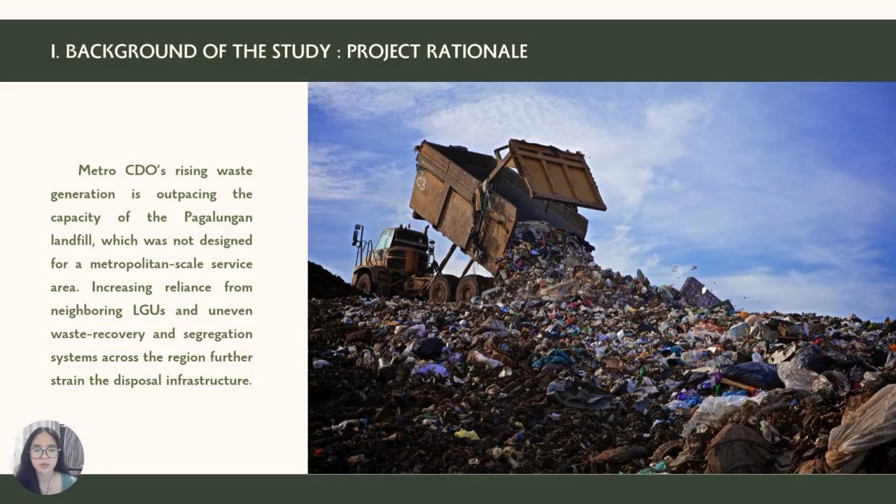This study seeks to rationalize the need for optimizing current landfill operations, improving upstream waste processes, and creating an integrated SWM program that aligns with national mandates such as RA 9003, Sustainable Development Goals, and emerging circular economy frameworks. By establishing this rationale, the study positions itself as a timely and vital initiative that supports both short-term operational improvements and long-term metropolitan resilience. Next is the related studies and literature.

The Pagalungan landfill has been under continuous scrutiny and regulatory oversight by the Environmental Management Bureau of the DENR Region 10 due to persistent concerns over its compliance with the standards and operational requirements set by RA 9003. Multiple inspections, monitoring reports, and issued notices have highlighted lapses in environmental safeguards, infrastructure adequacy, and procedural adherence, prompting ongoing corrective actions and heightened regulatory pressure on the facility's operations.

So, the current issues of environmental compliance are poor waste segregation, recent interventions from the city, leachate management problems, improper landfill expansion and operational violations, and mud-damaged access roads. The major issues in the Barangay Pagalungan SWM management are contractor performance issues, unauthorized dumping and junk shop violations, a non-functional leachate treatment facility, and inadequate access roads.

Next, the citywide SWM systemic issues of Cagayan de Oro City are its low compliance with waste segregation at source, barangay MRF non-compliance, and its lack of alternative disposal technologies.

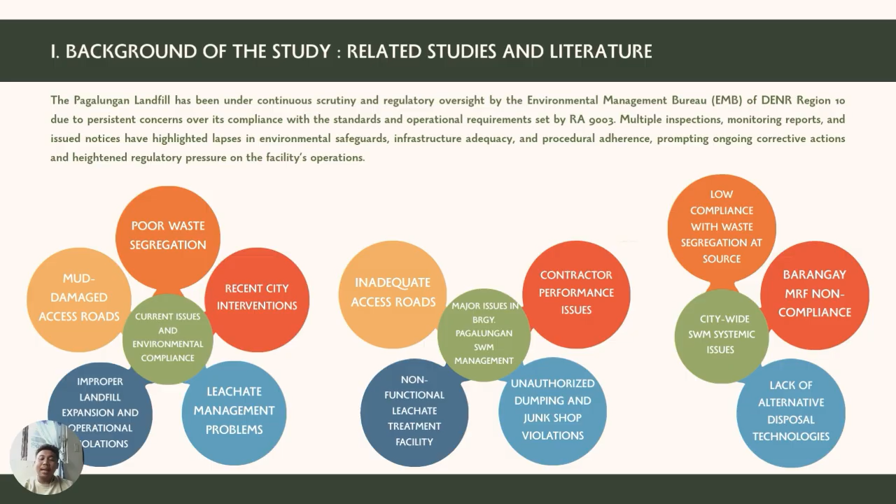For the weaknesses, we acknowledge concerns such as soil erosion, leachate risk, and vegetative loss. These are typical vulnerabilities of landfill sites, and recognizing them early justifies the engineered controls we incorporated, including liners, drainage channels, and reforestation. We also point out community perception and health concerns, which validate the need for transparency, better facility design, and strict environmental safeguards.

Opportunities show the project's potential to go beyond basic disposal. The site can host solar and wind installations, expand recycling and composting, and even adopt waste-to-energy systems. Public-private partnerships and eco-education programs further support long-term sustainability and community engagement.

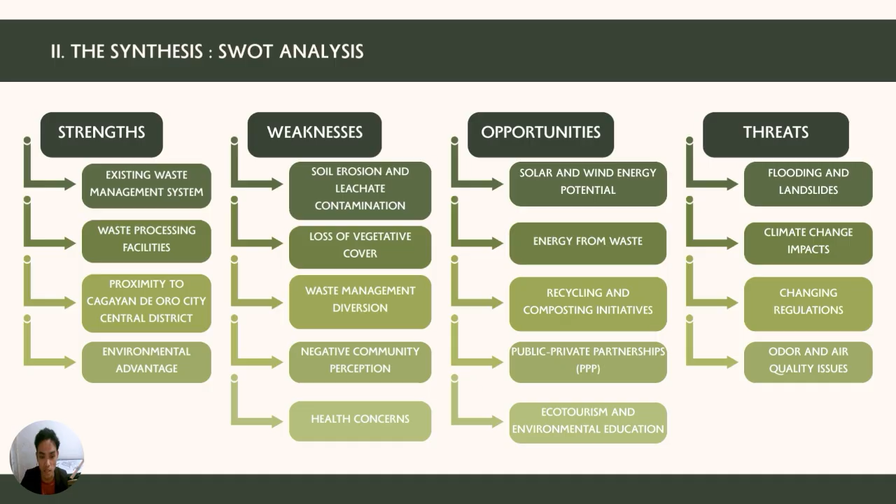Finally, the threats such as flooding, climate impacts, regulatory changes, and air quality issues emphasize why resilience is central to our design. These risks justify our choice of durable materials, proper zoning, and proactive environmental management. Overall, this SWOT analysis does not just list factors but demonstrates why the project strategies are necessary and well grounded. So now let's move on to our problem synthesis.

The proposed Metro Cagayan de Oro Regional Sanitary Landfill Optimization and Integrated Solid Waste Management Program is a comprehensive technical intervention designed to address the operational, environmental, and systemic deficiencies identified in the current landfill facility. The project encompasses the engineering enhancement of existing landfill cells through improved slope stabilization measures, installation of advanced leachate collection and treatment systems, and reinforcement of impermeable liners to minimize subsurface contamination.

It also integrates vegetative rehabilitation and buffer zones, reforestation to mitigate habitat loss and erosion. Operational improvements include the establishment of a material recovery facility, a hazardous waste microtreatment unit, and waste diversion infrastructure to reduce residual waste entering the landfill.

The program further incorporates air quality control measures such as methane capture or flaring systems, odor mitigation technologies, and continuous environmental monitoring. Collectively, these components aim to upgrade the facility into a regionally coordinated landfill system capable of meeting contemporary engineering, environmental, and public health standards.

The selection of this project was guided by a diagnostic evaluation of the landfill's existing conditions, wherein the identified weaknesses demonstrated significant risks to environmental integrity and operational sustainability. Technical assessment revealed that soil erosion along steep fill slopes, inadequate leachate containment, and the absence of engineered diversion pathways could accelerate geomorphological instability and contamination of adjacent water bodies.

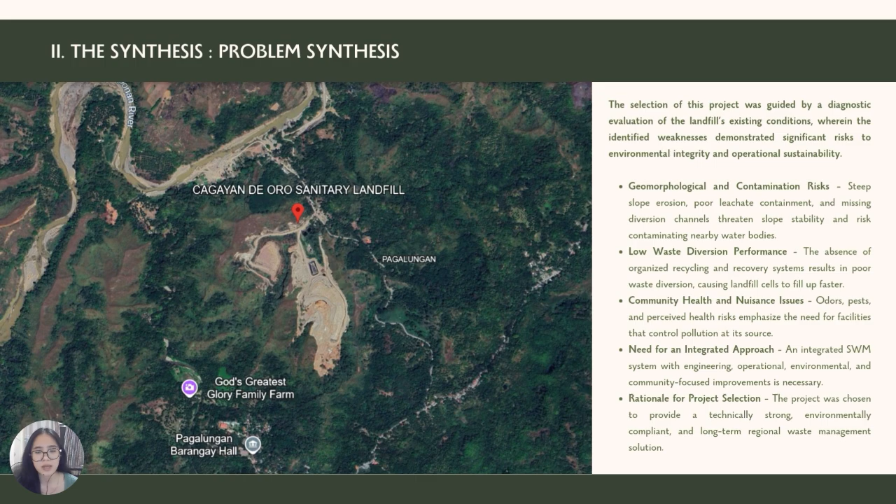Next is the project filtering. We have set up two project filters for the proposed landfill development. The first filter is the strategic fit and regional integration. It ensures that the project supports the spatial and functional structure of Metro-CDO. It prioritizes facilities that serve multiple LGUs such as Cagayan de Oro, El Salvador, and Alubijid, and promotes shared infrastructure efficiency. It reinforces inter-LGU cooperation and reduces duplication of waste facilities.

Next filter is environmental sustainability and resilience. It evaluates compliance with the DENR EMB standards of RA 9003, prioritizes sites with proper liners, leachate treatment, and gas control systems, and promotes waste diversion such as segregation, recycling, and composting to minimize the landfill impact and extend its lifespan.

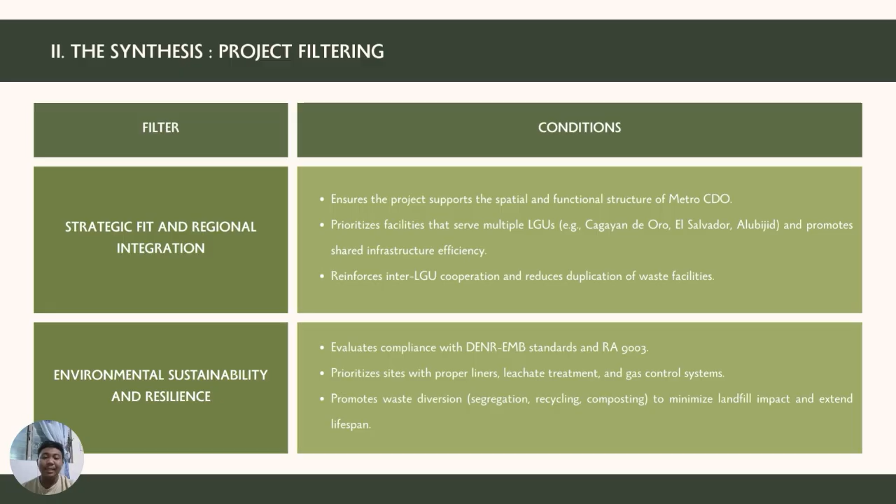Its location in Barangay Pagalungan is highly accessible to CDO and neighboring municipalities, making it a logical regional waste management hub. The site also has a single controlled access road, which is an advantage for monitoring, security, and environmental compliance. The surrounding steep natural terrain acts as a natural buffer, significantly reducing odor, noise, and visibility impacts on the community. Another advantage is that the site is far from dense residential zones, which minimizes social conflict and health risk.

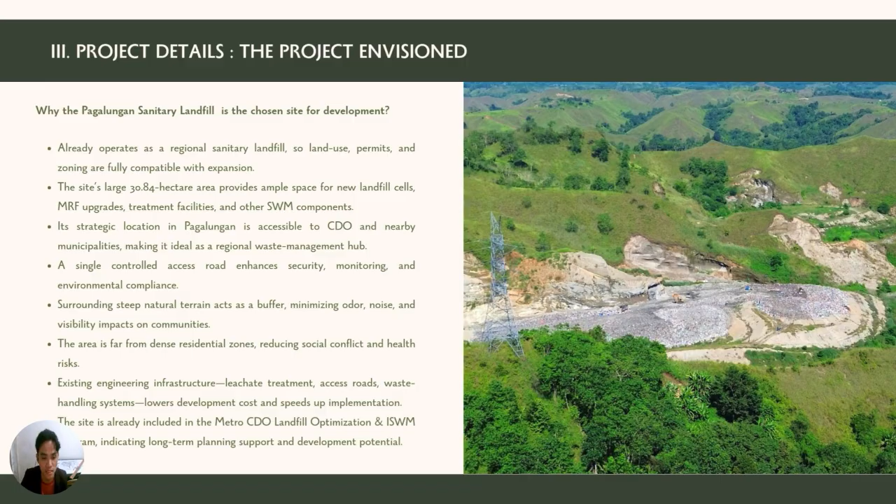The existing engineering infrastructure, such as leachate treatment systems, access road, and waste handling facilities, lowers development costs and accelerates implementation. Finally, Pagalungan is already included in Metro-CDO's long-term landfill optimization and ISWM plan, which means the site has strong institutional support and clear development potential.

So now let's talk about the chosen site. The 308,394 square meters or 30.84 hectares site forms an irregular polygon shaped by its natural topography and engineered landfill components, resulting in a landscape that blends operational zones, buffer areas, and environmental control features.

Access to the property is limited to a single vehicular entry point on the eastern side, which links to the barangay road network serving nearby communities in Barangay Pagalungan and serves as the only route for waste transport trucks, service vehicles, and maintenance personnel entering and exiting the facility. No additional access is available along the northern, western, or southern boundaries due to steep forested slopes, protected terrain, and undeveloped land that inherently restrict movement and preserve natural cover.

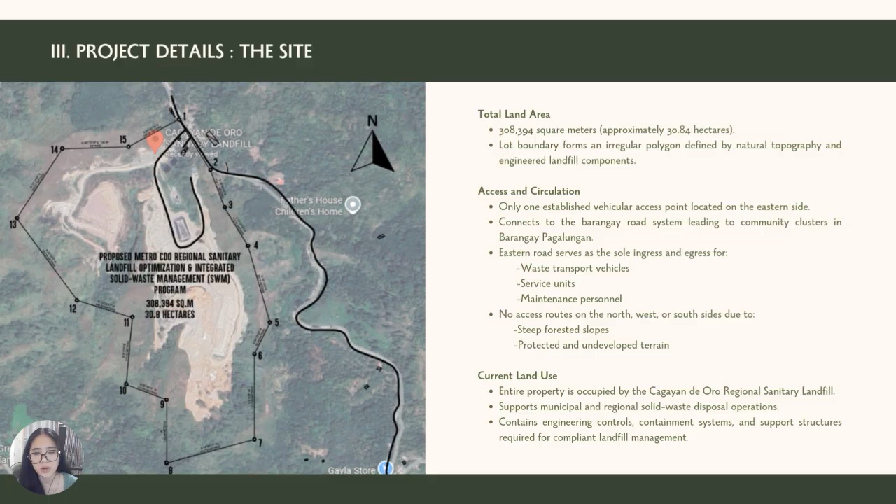The entire area is dedicated to the operations of the Cagayan de Oro Regional Sanitary Landfill, accommodating regional waste disposal activities as well as the engineered containment systems, monitoring infrastructure, and support structures required for compliant landfill management. The site's configuration and limited access underscore the importance of efficient circulation planning and robust environmental safeguards to ensure safe, continuous, and sustainable facility operations.

For the next project detail is the design concept. The site is situated in Sitio Buracan, Barangay Pagalungan, Cagayan de Oro City, approximately 17 kilometers from the city center. The facility has a total land area of about 30.84 hectares. For the daily volume, the city generates an estimated 600 to 700 tons of garbage per day, which is managed by the City Local Environment and Natural Resources Office, or the CLENRO, and its contractors.

The architectural style of the whole facilities inside the landfill development is contemporary industrial architecture, which is defined by large span structures, exposed steel elements, simple geometric forms, and functional layouts that support efficient operations and natural ventilation. Contemporary elements such as patterned facade screens, earth tone finishes, and vertical shading enhance the utilitarian character, creating a cohesive, modern visual identity through clean lines, modular rhythms, and refined detailing.

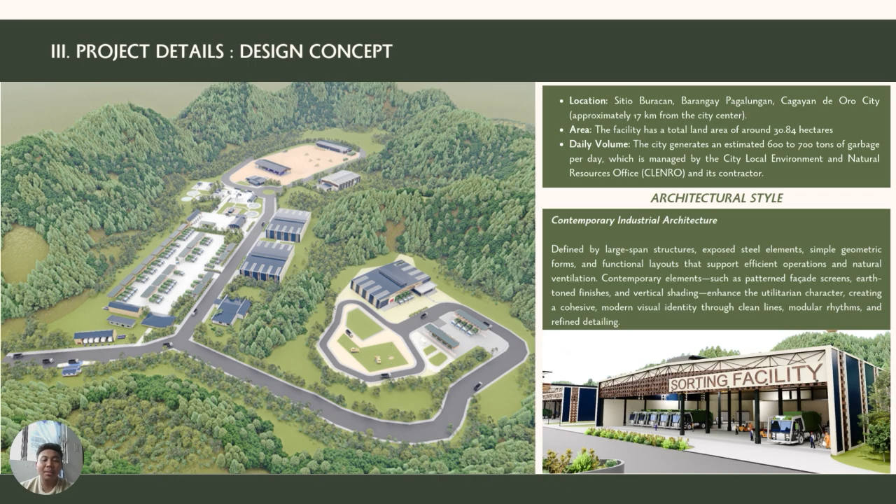The design concept of the proposed Metro-CDO Regional Sanitary Landfill Optimization and Integrated Solid Waste Management Program is anchored on the principles of environmental sustainability, engineering efficiency, and long-term operational viability. Quote: reimagining waste infrastructure through regional synergy and sustainability.

For our philosophy: study nature, love nature, stay close to nature, it will never fail you. This philosophy positions nature as the primary design guide in architecture and a meaningful tool for environmental stewardship. By integrating ecological sensitivity with purposeful built forms, the project becomes resilient, context-driven, and capable of elevating Metro-CDO's waste management identity while upholding the natural systems that sustain the region.

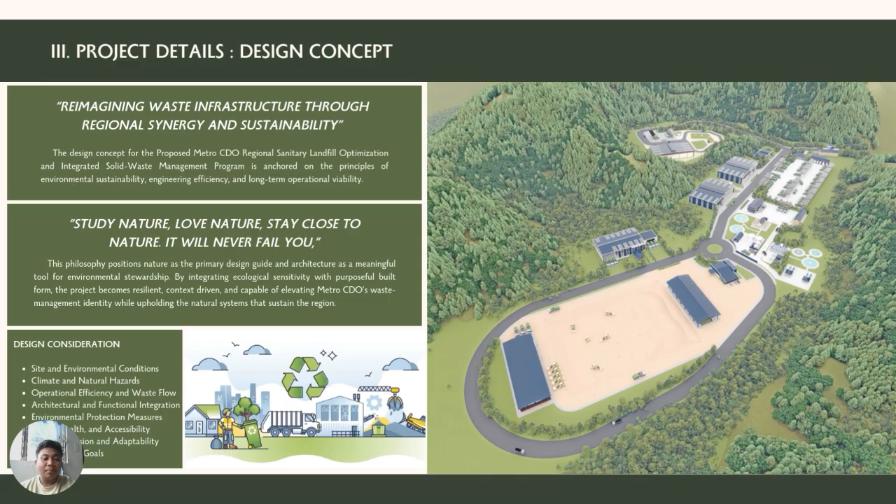For our design considerations, we have the site and environmental conditions, climate and natural hazards, operational efficiency and waste flow, architectural and functional integration, environmental protection measures, safety, health and accessibility, future expansion and adaptability, and sustainable goals.

Next, we have the project phasing. We have 5 phases for our landfill development. The first phase, the site preparation and essential infrastructure, includes land clearing, earthworks, slopes and slope stabilization, perimeter fencing, main access roads, stormwater channels, and drainage control. Phase 2, the core sanitary landfill system, includes the first landfill cell, leachate treatment facility, the weighbridge, disinfection area, and internal service roads around the landfill cells.

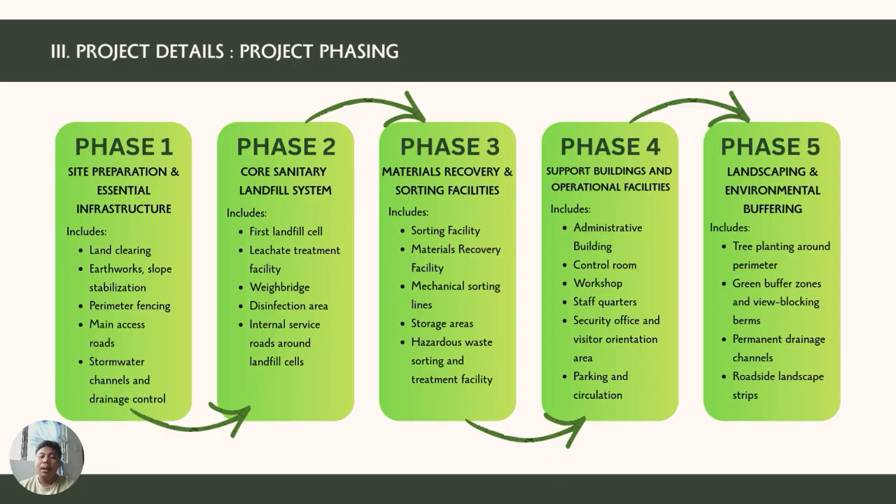Phase 3, the materials recovery and sorting facilities, includes the sorting facility, the materials recovery facility, mechanical sorting lines, storage areas, and hazardous waste treatment facility. Phase 4, the support buildings and operational facilities, includes the administrative building, the control room, the workshop, the staff quarters, the security office and visitor orientation area, and parking and circulation. The last phase, phase 5, is landscaping and environmental buffering, which includes tree planting around the perimeter, green buffer zones and view blocking berms, permanent drainage channels, and roadside landscape strips.

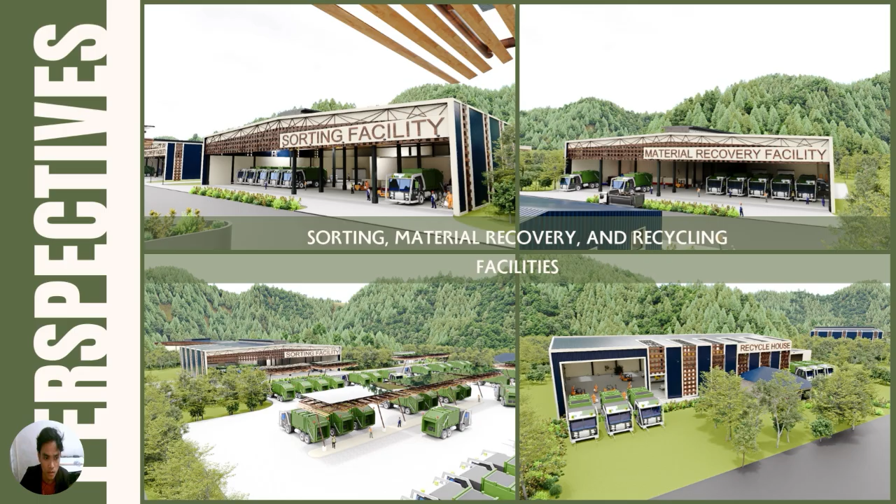This image shows the sorting facility designed for initial waste segregation. The open structure and large span support efficient workflow and safe equipment movement. The second perspective highlights the MRF, or Material Recovery Facility, where recyclables are processed. The layout prioritizes clear workflow and safe circulation for both workers and vehicles. The third one at the bottom shows the recycling house, where recovered materials are refined or prepared for reuse. The design incorporates ventilation and daylight to improve working conditions.

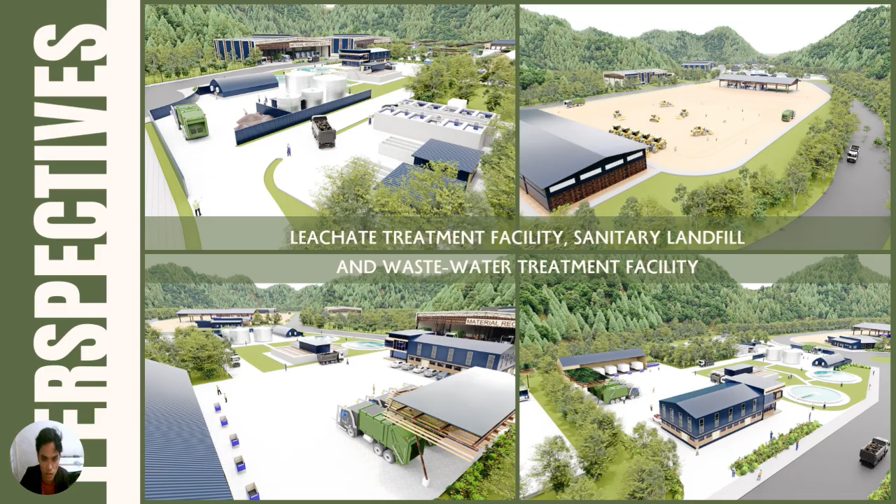Here the first image shows the leachate treatment system, designed to prevent groundwater contamination through a controlled collection and treatment process.

So in the second one, we have our sanitary landfill cells positioned to work with the natural terrain and supported by engineered liners and drainage system. And lastly, we have the wastewater treatment area that handles site-produced liquid waste, ensuring compliance with environmental standards.

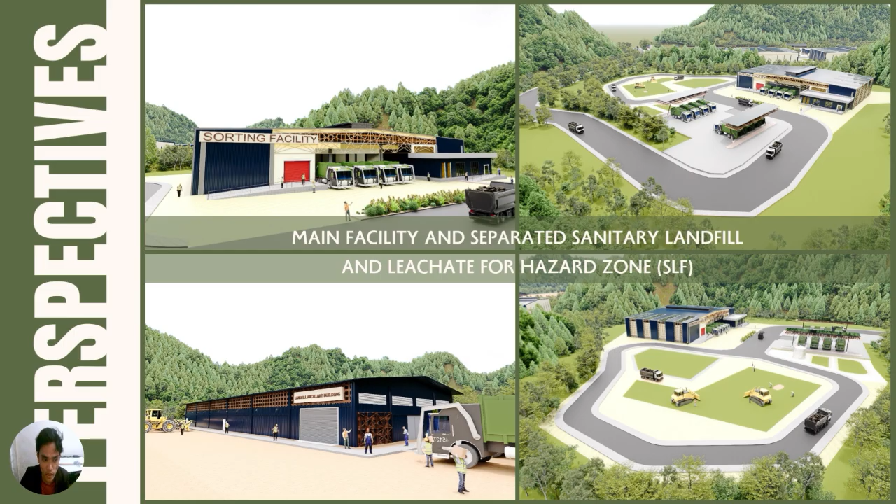In this one, we have the main facility for hazard zone. It is strategically isolated to safely handle special category waste with enhanced monitoring and containment. And the other one, we have the hazardous waste landfill and a leachate area. So this is designed with reinforced barriers and controlled access to ensure safe and compliant disposal.

So now let's discuss the United Nations Sustainable Development Goals that are aimed specifically for landfill facilities. The proposed research directly contributes to several of these Sustainable Development Goals, first of which is SDG 6, or Clean Water and Sanitation. Proper solid waste management prevents uncontrolled dumping and leachate from contaminating rivers, groundwater, and drainage systems. The program ensures sanitary disposal and treatment of waste, reducing waterborne diseases and safeguarding clean water sources for communities.

Next, we have SDG 7, or Affordable and Clean Energy. The program can integrate energy recovery methods such as biogas capture from decomposing organic waste or waste-to-energy technologies, providing a renewable energy source that reduces reliance on fossil fuels. Next, we have SDG 8, or Decent Work and Economic Growth. Integrated waste management creates jobs in waste collection, segregation, recycling, and landfill operations. It also stimulates local industries for recycling and materials recovery, supporting sustainable economic activity.

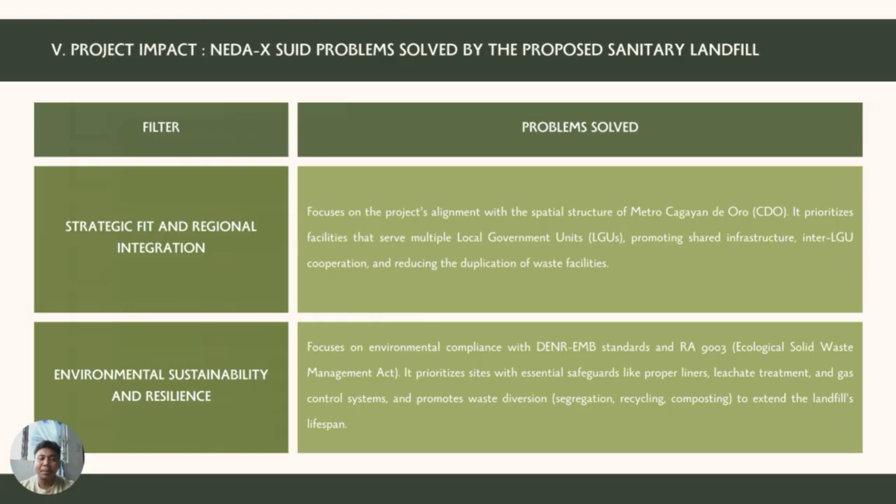In terms of climate change mitigation, the facility supports renewable energy options, reduces methane emissions, and enhances carbon sequestration through vegetation buffer. The development provides safe and resilient infrastructure designed to withstand natural hazards and climate-related stresses. It contributes to enhanced community livability by reducing odor, traffic conflicts, and environmental risk while creating a cleaner and more organized waste management system.

Finally, the project ensures alignment with regional sustainability goals, supporting LGU targets for solid waste management, environmental protection, and climate resilience. Overall, this initiative delivers long-term ecological benefits and significantly improves the quality of life in surrounding communities.